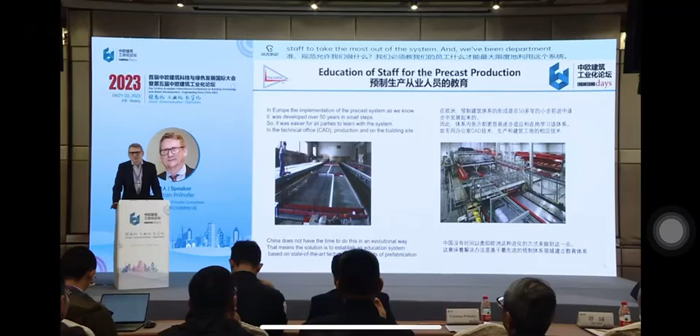There was too little competition in China, and with this little competition, efficiency is also lacking. And efficiency is one of the driving factors for education, for using the material best, using the time best, and using all resources best.

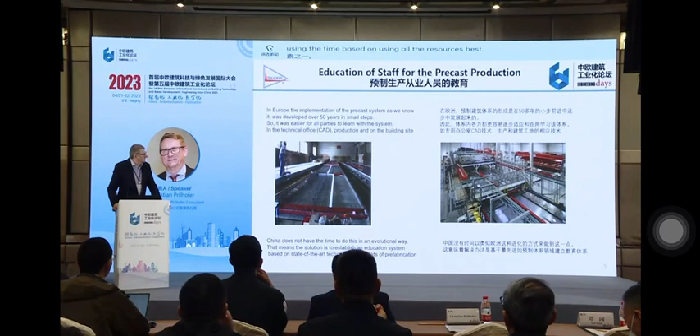When we think about the education, then we can see this in three main areas: engineering, production, and assembly. And the ranking is also about the importance, because in this engineered system, all the decisions, all the brain work, and all the main things have to be done in the engineering department. This is very similar to mechanical engineering. When you make the drawing, when you make the specification, all the main things are set.

The way to the success is there, or if not, production and assembly cannot correct what isn't made right in the engineering department. And so the focus must be to see the precast system as a system where all the main decisions have to be made in the engineering department.

Then production and assembly, this is more about efficiency, about quality, and about these things. But as said before, what isn't decided at number one, the other departments cannot correct it. They can only make the best out of it. And what we also learned from Europe, with 10% more effort in the engineering, you can save up to 30% in production and assembly.

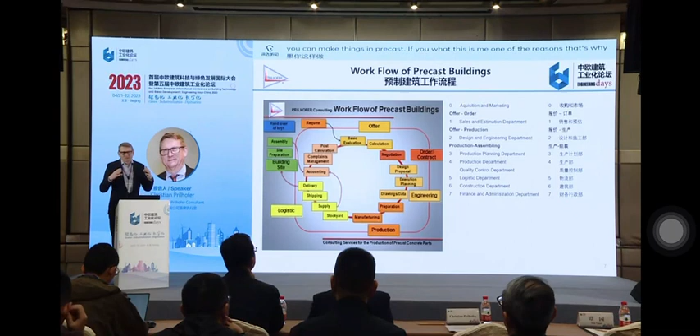Everything is linked together. And this is the difference to traditional ways to build, where you have, in certain stages, freedom, where you can make decisions or you can make things. In precast, this is maybe one of the reasons that for existing companies from cast in situ, it is very hard to change to the precast system.

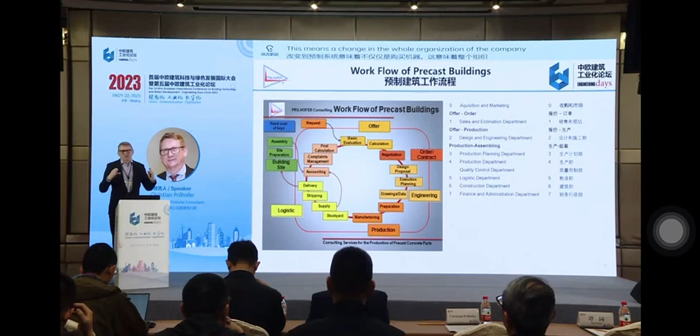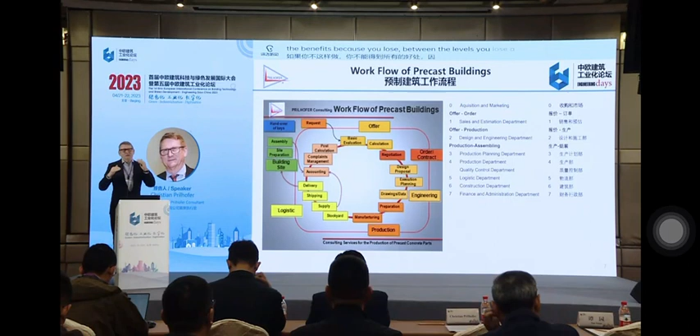Because changing to the precast system means not only buying machines, this means a change in the whole organization of the company. You have to give the company a new direction, how to produce prefabricated. And if you don't do this, you cannot get all the benefits, because you lose between the levels, you lose a lot of energy, time, and money.

Coming to the factory, this is also kind of a circle. And here we just talk about efficiency of workers, because the new carousel production plants are like a manufacturing conveyor line of cars or whatever. And there, every minute, every second counts. And the better the work is prepared, the better the information is prepared, the more time is left over for the worker to do his work.

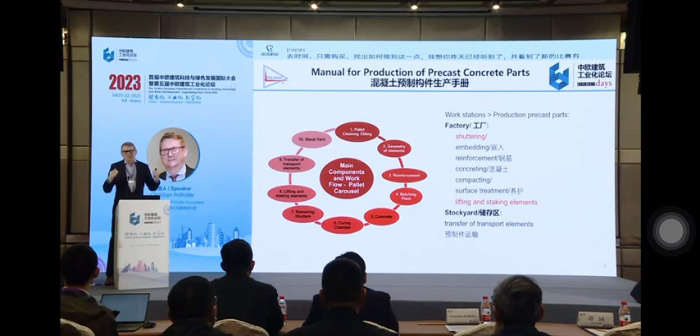And if you give workers too much or wrong information, they will lose time just by finding out what to do, how to do it. And I think you heard it yesterday, so the new way is to have screens, to go away from paper and to give the information step by step. Because the easier it is for the worker to see what to do, just give the information which is necessary for the different step, not all the information.

Because giving all the information means the worker will lose, from a cycle time of 10 or 15 minutes, 5 minutes just to orientate what to do, how does it look like. And the idea is just give the information. And this can be done in a visual way, or maybe in the future also

that the worker has an earphone, and then gets the information in an audio way to say, look, this is your work, this is what you have to do at a certain station. And don't care about the station before, don't care about the station after. Just make your work and send the table to the next station.

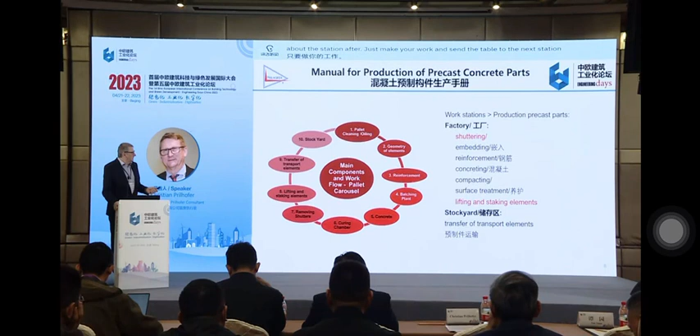Here again, the different departments, also about the importance. Architecture gives us the form, the shape of the building. And this is number one, because if architecture is fixed, fewer changes in the appearance and in the form of the building are possible. When this is done, we have to think about the building system.

And there are also no borders between the departments. They have to work close together, and the architect should not see the structural engineer as a natural enemy. They have to see themselves as a team to get the best out of it. And all the successful companies that we are helping worldwide see this as a linked process: you can only get the best out of the material, with the most savings, the best quality and the best appearance, if all these departments work together.

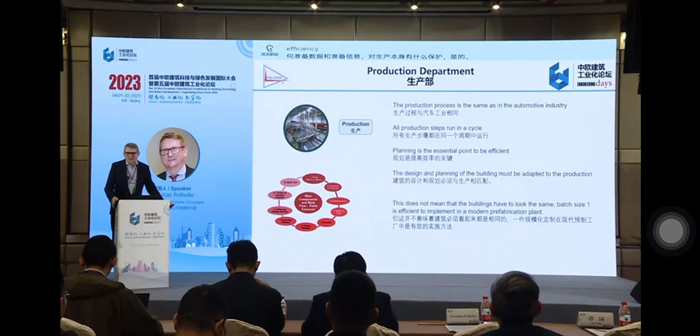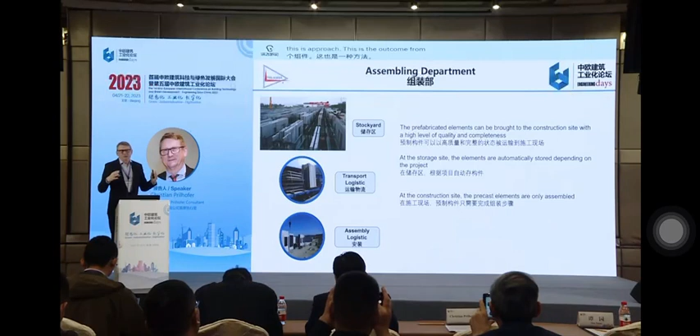And this is an iterative process to find out what is the best appearance, building system, and also how to prepare data, prepare information for the production. The production itself is more an industrial approach: efficiency, Kaizen, whatever is possible, just to do the best out of the information you get. Stockyard, transport, logistics, assembly also. This is the outcome from the framework which is done in the engineering department and architectural department.

In Europe, the training is maybe done in a different way. Why? Because due to these 50 years of development, the companies have the experience in the company. They learn with the system and they develop. So in Europe, no special education centers are necessary. When you come from university, you go to the company with all the skills, the basics, and then you get the training required to understand and use precast directly in the companies. And this is very widespread.

So universities just provide the basics, and the next level is training directly on the job, which is possible because there are so many experts using precast over the years. And also, as I said before, due to the competition between the companies, it is also a competition of education. When you come into a good company, they will tell you, look, you have to use this, and we are better than our competitors. And so all the young staff get a super education on efficiency and everything, because this is part of the success of the company.